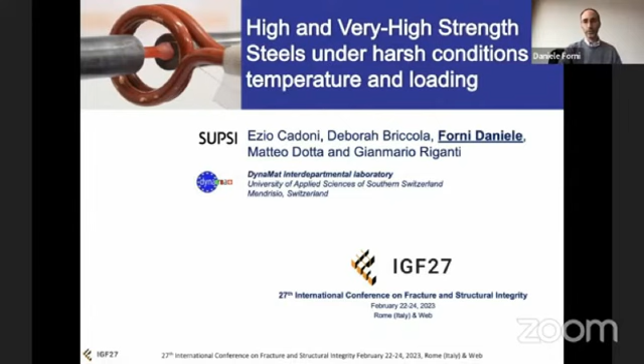My name is Daniele Forni, and I'm here to present our paper entitled High and Very High Strength Steels Under Harsh Conditions of Temperature and Loadings.

In the last year, we can remember different events of this type: for example, the 9/11 terrorist attacks, the Deepwater Horizon disaster, the BASF headquarter disaster, the Rigopiano snow landslide, the highway bridge explosion near Bologna, as well as the Morandi Bridge collapse.

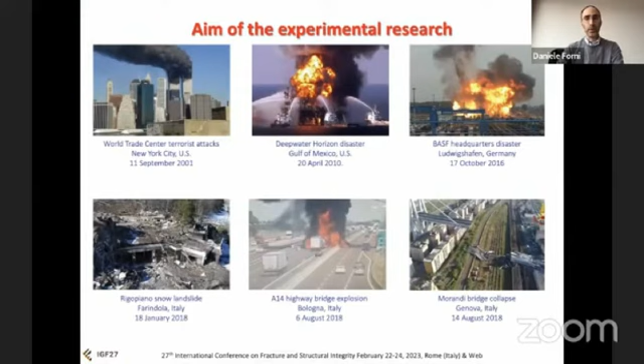The question is, what are the common things among these events? They are all dynamic events characterized by combined effect of actions, leading to a large number of fatalities and high cost for reconstruction and demolition.

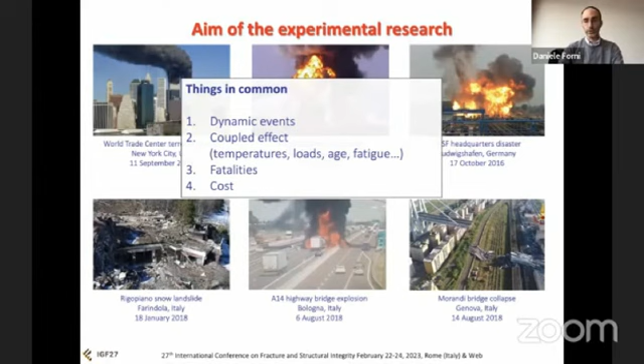The main objective of our project was to understand the mechanical behavior of both structural and reinforcing steels under the combined effect of dynamic loads and temperatures. Today, we will focus attention on the structural steels named S690 and S960.

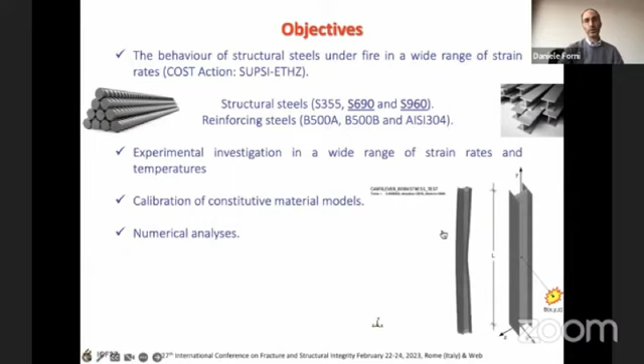You can see, for example, a simulation of a steel column which I've done. We obtained the samples for the mechanical characterization, as you can see on the top right of the images, starting from the raw section of the material.

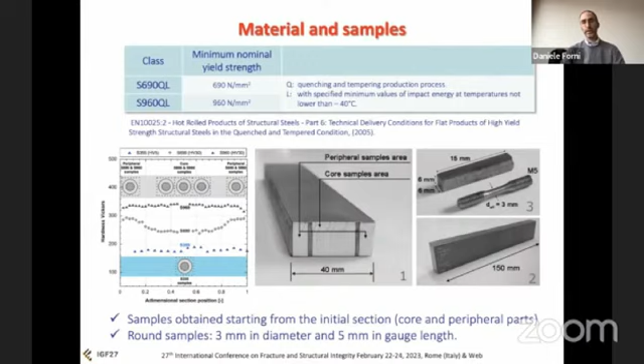We know that the material is not homogeneous within the thickness, because we have a peripheral region which has a martensitic microstructure, while the core has a bainitic one. For this reason, we obtained two types of samples made of different submaterials from the core and the peripheral zone.

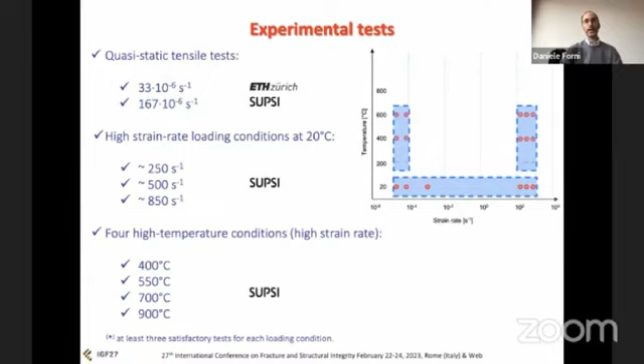This is the experimental plan we did: starting from the quasi-static conditions to the high strain rate test at room temperature, then by keeping the same loading condition, we also did the high strain rate test at high temperatures.

The dynamic characterization has been performed by using a modified Hopkinson tensile bar, plus the addition of an induction water-cooled heating system, as you can see on the image.

The tests were performed firstly by heating the sample at the desired temperature, and then by keeping the temperature constant for some seconds or minutes, and then performing the dynamic test.

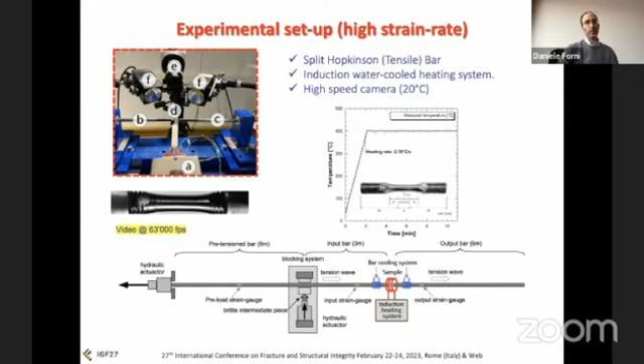Only at room temperature, due to the shape of the coil, we recorded the failure process by means of a high-speed camera to capture the failure process of each sample.

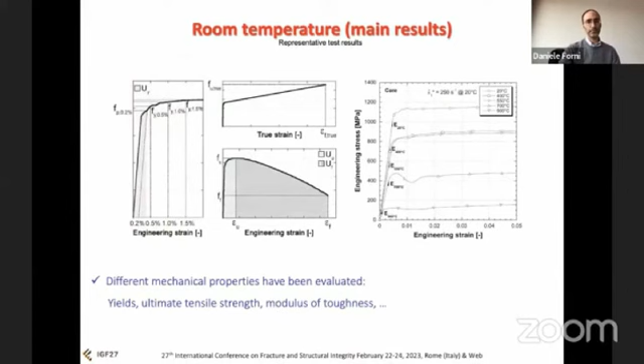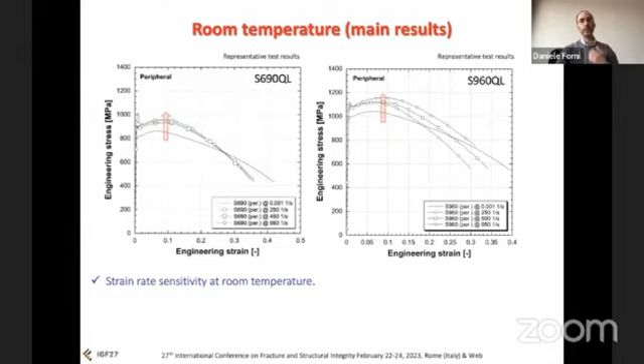Let me say something about the room temperature test very quickly on this stress-strain graph, in which, for the sake of simplicity, we have reported only the peripheral zone for the two materials, S690 and S960. We can see the strain rate sensitivity starting from the quasi-static test to the high strain rate test.

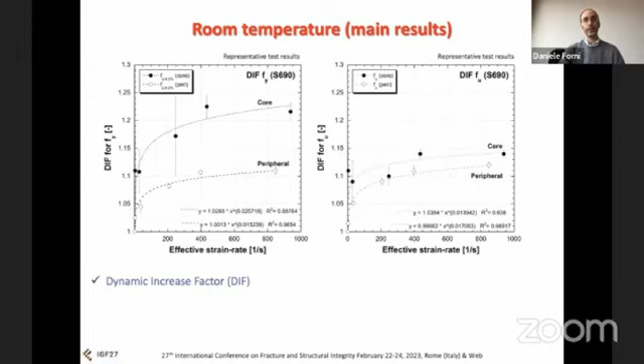The strain rate sensitivity is also well represented in these plots, where the dynamic increase factor, as the ratio between the quasi-static and the dynamic mechanical properties, is depicted. On the left, this ratio is reported for the yield, while on the right it is depicted for the ultimate tensile strength, highlighting the different strain rate sensitivity of core and peripheral zones.

So something about the temperature effect: it's obvious that at increasing temperature, we have a decrease in the mechanical strength. But we have observed in particular that up to 400, 550 degrees, the yellow and orange curves, we have only a limited decrease in strength. While for higher temperature, starting from 700 Celsius, the decrease is more evident, as is also the total elongation, as you can see on the red curves.

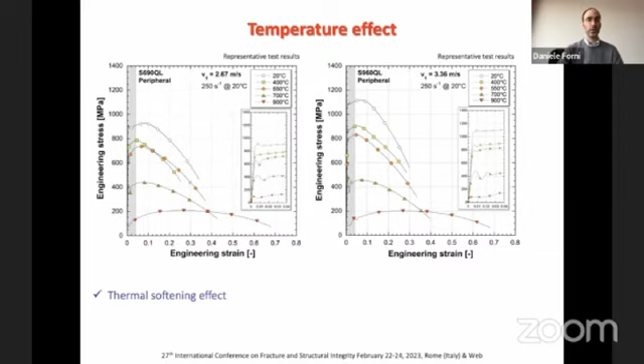This is also well represented in these two 3D surface plots, where both yield on the left and the ultimate tensile strength on the right can be represented.

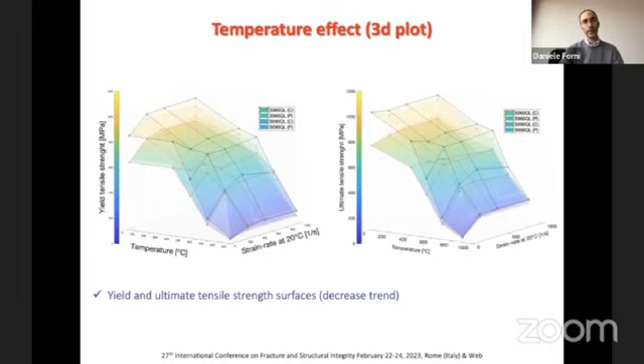So to say something about the material models, we know that there is an increasing demand for complex numerical simulations of civil engineering structures. This is to evaluate the structural robustness under extreme loading conditions, for example, high temperature and dynamic loads.

The link between the mechanical properties and a numerical simulation is a material constitutive law. So we have considered three different approaches. The first is calibrating the experimental test results with the elastic-elliptic-perfectly plastic model proposed by Eurocode 3, but under dynamic conditions. The last two are the commonly used constitutive relationships describing the mechanical properties of metallic materials at high strain rates: the Cowper-Symonds and the Johnson-Cook relationships.

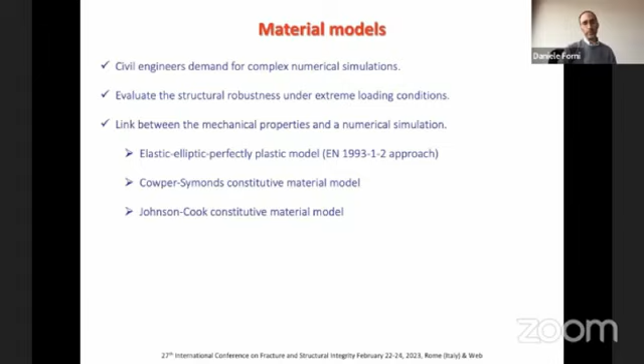The choice amongst these three approaches can depend on different aspects, for example, the problem to be simulated, or in the case of the last two, because the Cowper-Symonds and Johnson-Cook constitutive material models are the most commonly implemented and easy to use constitutive relationships in finite element programs.

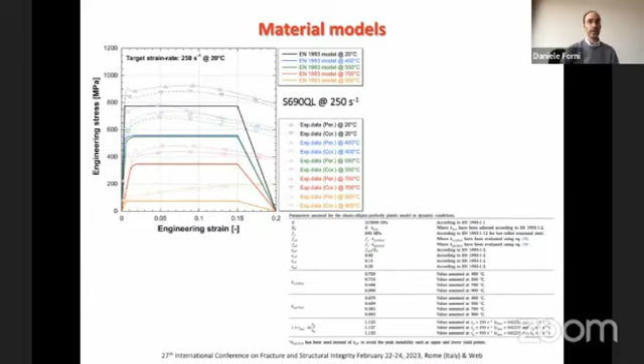So in the first case, for the elastic perfectly plastic approach of Eurocode 3, we have reported an example of the 690 steel at 250 per second strain rate, and we can see that the model we have calibrated can safely predict the real mechanical behavior of the material in the range of strain and stress reported in the code.

On the other hand, with the simpler Cowper-Symonds constitutive model, it is possible, by calibrating only 2 parameters, to predict the yield and tensile strength at increasing strain rate, but in its original formulation only at room temperature.

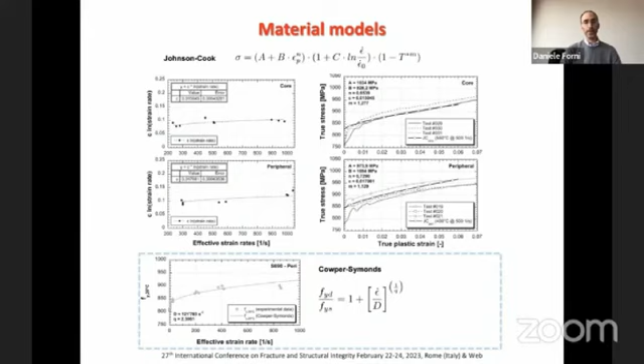So to conclude, we have investigated 690 and 960 structural steel as part of this investigation campaign to reveal more information and facilitate their widespread use. Following a multi-hazard approach for civil engineers, we have highlighted the necessity of understanding the mechanical properties of materials under the coupled effect of extreme actions.

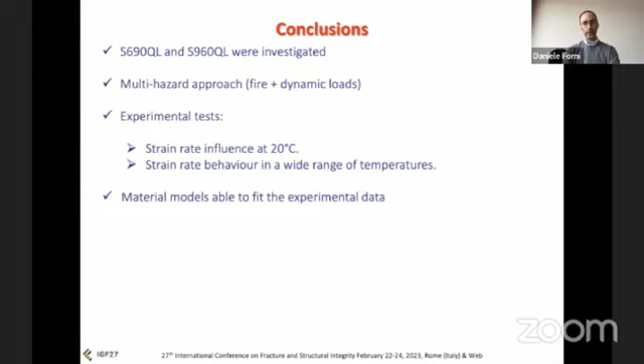From the experimental tests, we can say that the materials are strain rate sensitive both at room temperature, and the main properties at high temperature have been highlighted. Lastly, we can see that the three approaches of the models were able to fit the experimental data very well.

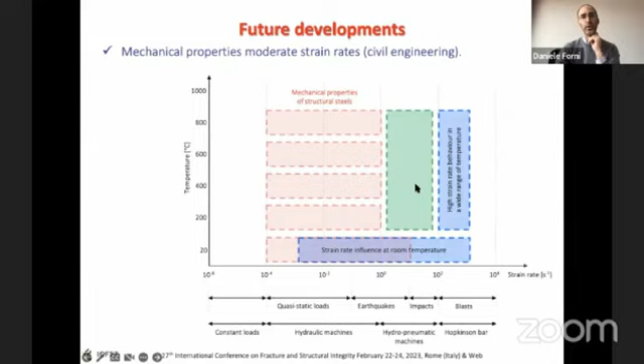As a future development, in the last seconds, we would like to study also the green area in which the strain rate is in the medium range, for example, for earthquakes, but also at different temperatures.

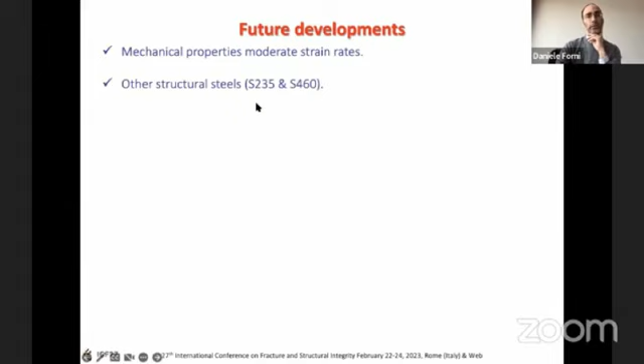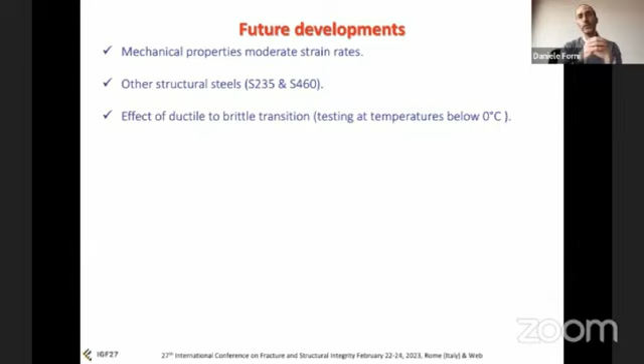We can also go on to study other structural steels, for example 235 and 460 steels. And of course, one of the more important future developments can be to study the effect of ductile to brittle transition, for example, by testing at temperatures below 0 Celsius, under dynamic conditions.